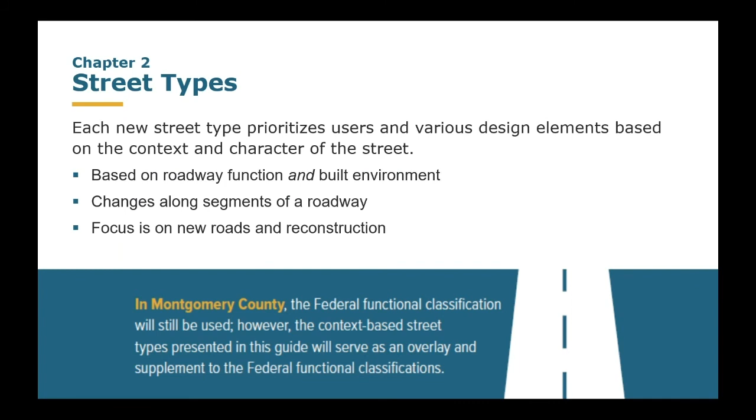There are 12 street types that we have developed for this study. What you'll notice is that there are actually 6 area types: downtown, town center, suburban, neighborhood, industrial, and country. Within each of these area types, there are a couple of different street types.

The first street type, downtown boulevards, are main streets you would find in CBDs. These typically have BRT routes planned along them and have frequent transit service and high pedestrian and bicycle activity. Examples shown within the guide and on the screen here include Georgia Avenue in downtown Wheaton, Rockville Pike in White Flint, and Wisconsin Avenue in downtown Bethesda.

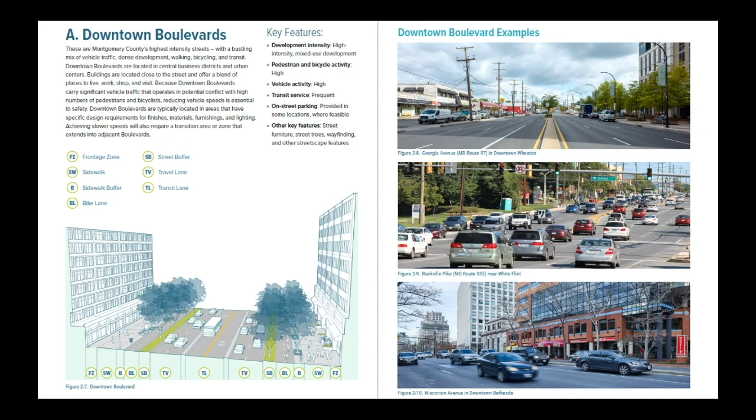Downtown streets are often the side streets in these same downtown areas. They typically have moderate transit service and high pedestrian and bicycle activity. Examples include Fenton Street in downtown Silver Spring, Nicholson Lane in White Flint, and Grandview Avenue in downtown Wheaton.

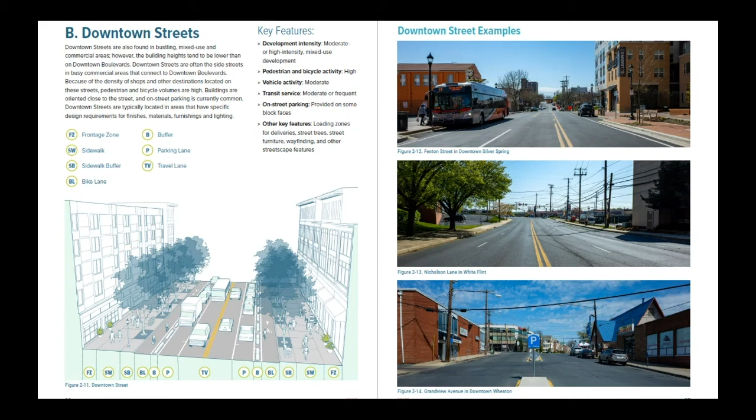Boulevards are the main arteries in the suburban portion of the county that provide critical connections between major activity centers. These roads have frequent transit service, are likely a master plan BRT corridor, and typically have moderate pedestrian and bicycle activity. Access to transit has typically been the priority in the past in providing bicycle and pedestrian facilities along these corridors.

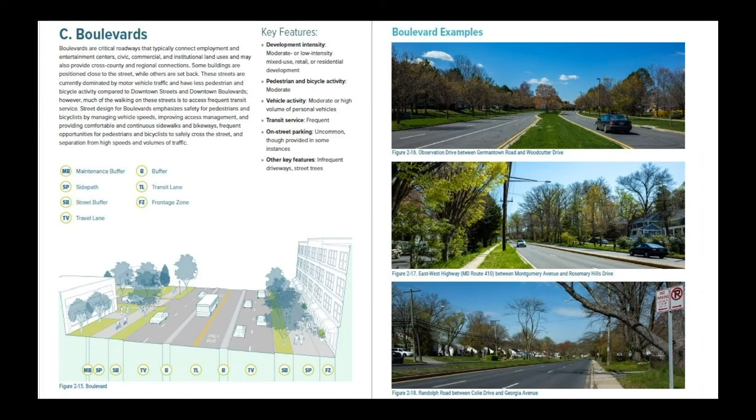Town center boulevards are located in medium to small activity centers, of which there are many within the county in a wide range of contexts. These roads provide high traffic volumes, frequent transit service, and moderate to high pedestrian and bicycle activity. Examples shown include Connecticut Avenue in Aspen Hill, Veirs Mill Road near Randolph Road, and River Road in Westbard. This area type also includes areas such as Damascus, Olney, Germantown, and Burtonsville in the upper and northern portions of the county.

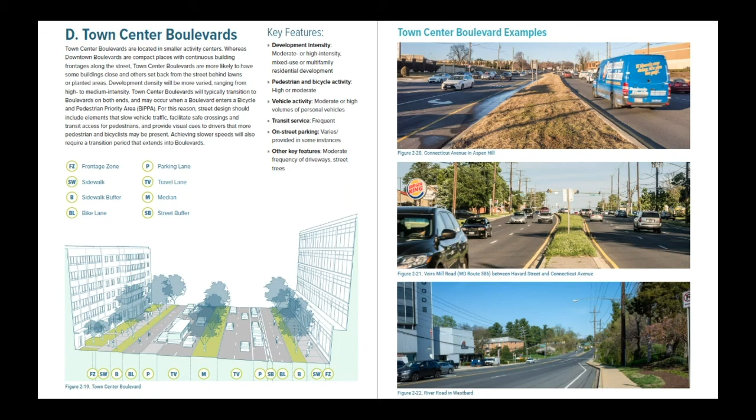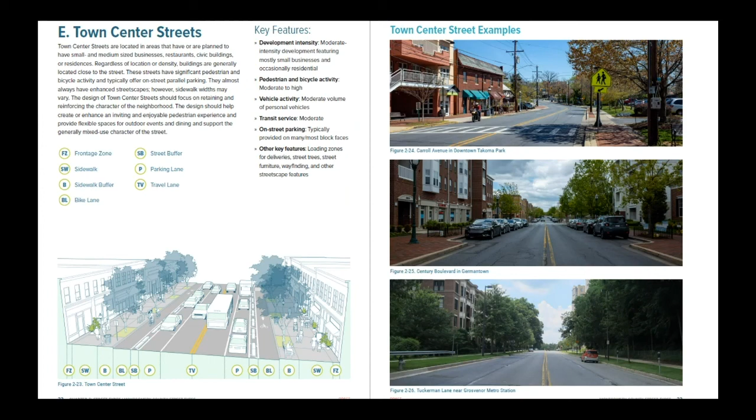Town center streets are typically the side streets in town center areas. They can support moderate intensity development, including commercial and residential development. Along these roads, transit service is typically moderate, and pedestrian and bicycle activity can range from moderate to high. Examples shown on this slide include Carroll Avenue in Takoma Park, Century Boulevard in Germantown, and Tuckerman Lane near Grosvenor Metro Station.

Neighborhood connectors are residential through streets. In our current road code, these streets are typically considered minor arterials or primary residential streets. Along these roads, transit service is typically moderate to high, and pedestrian and bicycle activity is moderate.

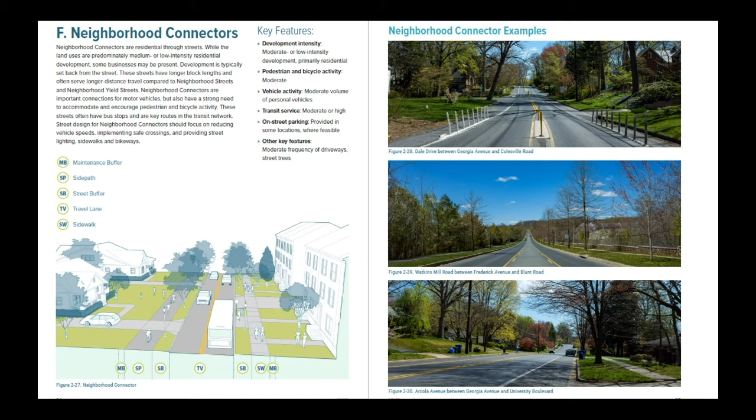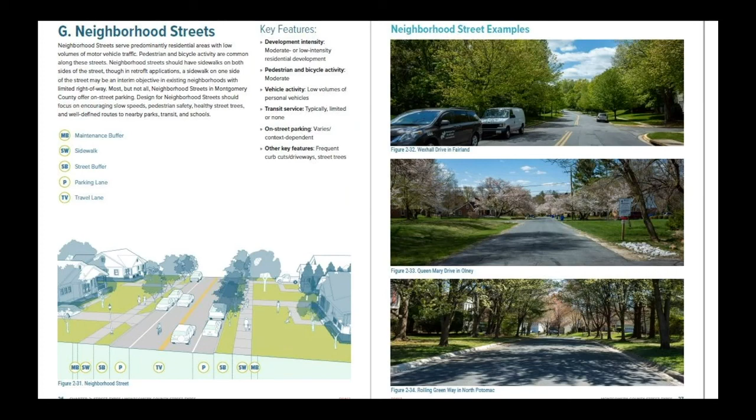Neighborhood yield streets are more narrow residential streets, very common in older residential areas in the county. With a total width of typically 28 feet, the street does not have a double yellow center line, and usually has parking on both sides. Vehicular travel really has to occur through one lane, and drivers have to negotiate and navigate around parked cars and cars coming from the other direction, as there's only one effective travel lane. As a result, these streets typically have slower vehicular travel speeds.

Pedestrian and bicycle activity is also very important on these kinds of streets, and there's definitely no transit service on most of them. Examples of this street type include Sanford Road in Forest Glen, Allegheny Avenue in Takoma Park, and Mansfield Road in Silver Spring.

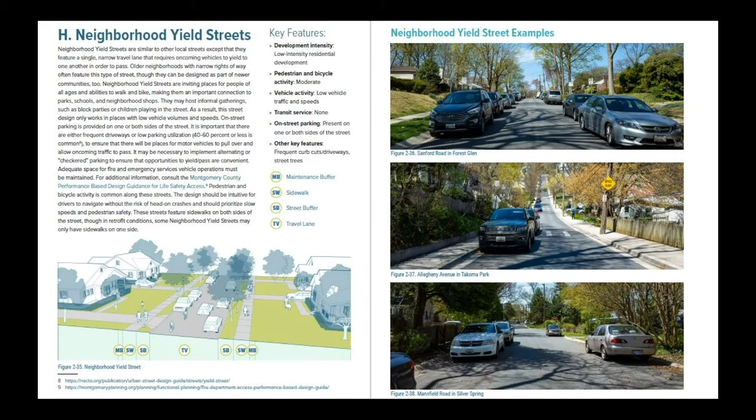Industrial streets are 2 to 5 lane streets that service and pass through industrial areas in the county. While there is a need on this street type to consider a higher percentage of large vehicles, these streets typically have moderate transit service and moderate pedestrian and bicycle activity, and many of them are often through streets as well, with some arterial function.

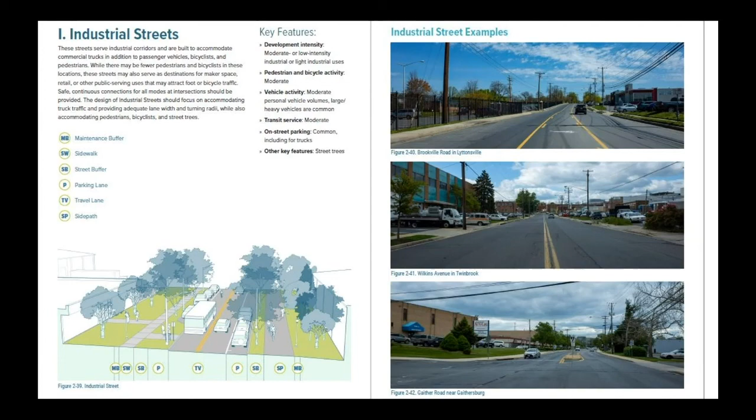Country connectors are the arterial streets in the rural areas of the county, and they provide a critical role in connecting communities. These streets typically have low to moderate transit service and low to moderate pedestrian and bicycle activity. This is one street type where it's clear that we have not always done enough in providing pedestrian and bicycle facilities in the past. Examples include Seneca Road, Germantown Road between Germantown Park Drive and Darnestown, the southwestern part of Germantown Road, and New Hampshire Avenue and Damascus Road between Ashton and Damascus.

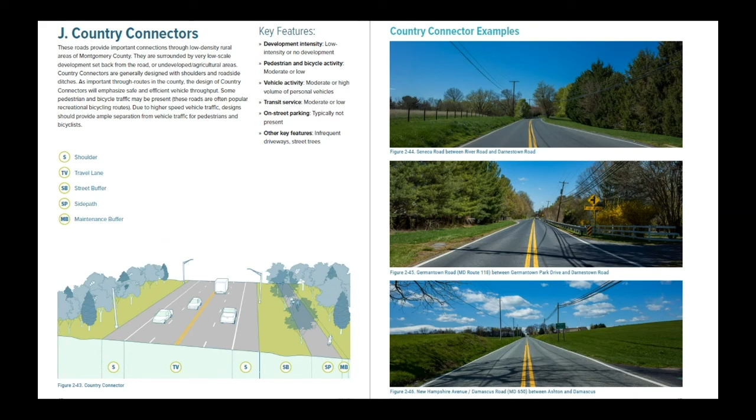Country roads are the main residential streets in rural areas of the county. Transit service along these roads can vary based on context, and pedestrian and bicycle activity can range from low to moderate. These roads are typically uncurbed, but some may have curbs in sections.

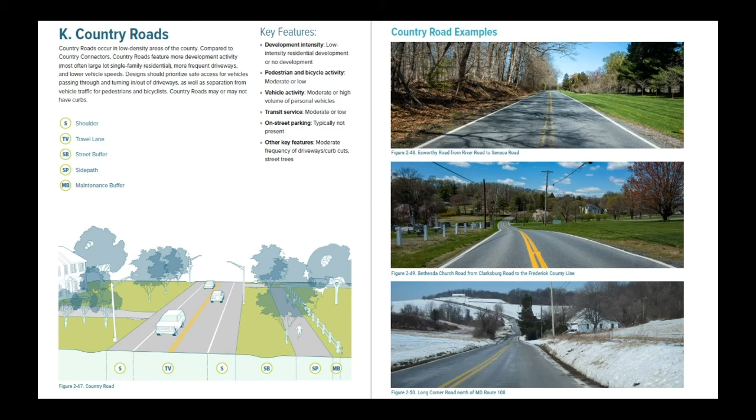This is the last of the 12 street types: major highways, which are limited or controlled access streets designed to focus on vehicular throughput. Transit service can range from moderate to frequent, and pedestrian activity is typically low. Examples include Sam Eig Highway near Washingtonian Boulevard, Great Seneca Highway, and Columbia Pike north of Prelude Drive.

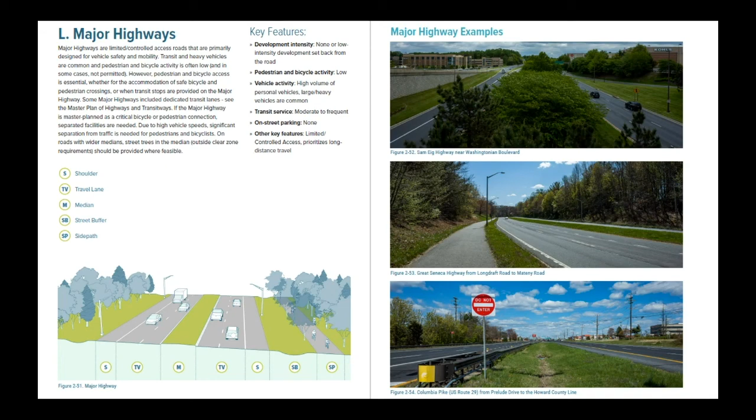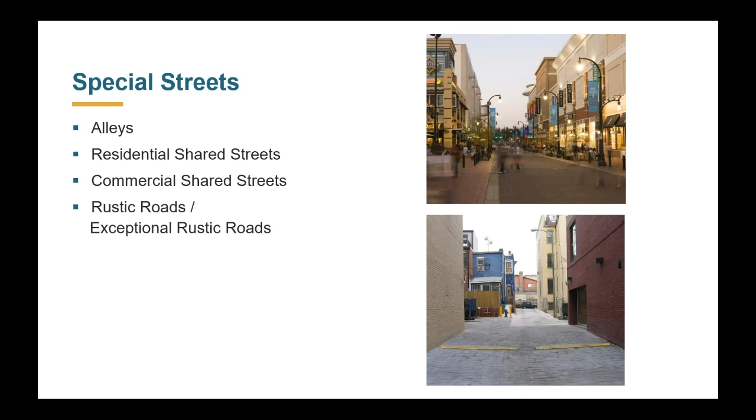In addition to the core street types, there are also more rare or unusual street types that the guide touches on briefly. For each street type, design guidance is provided within this document and in more detail in each of the following chapters, which Andrew will talk about shortly. There are many different elements—some physical, some geometric, some operational—and each street type has some slightly different nuances.

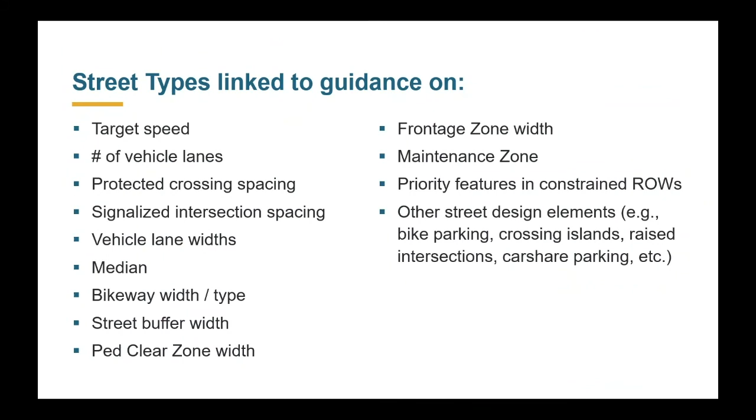Chapter 3 outlines the county's decision-making framework for street design, with an emphasis on identifying priorities in places with limited right-of-way. The master plan of highways and area master plans have established these rights-of-way, and these guidelines are not changing that. The intent of this chapter is to help designers prioritize improvements within these constrained rights-of-way. And with that, I'll turn it over to Andrew.

Hi, I'm Andrew Bossi with the Montgomery County Department of Transportation. I will take us through the rest of the chapters.

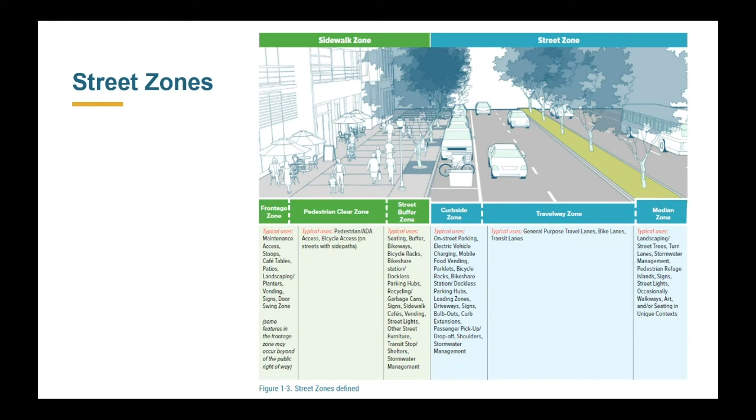Chapter 4 focuses on the sidewalk zone, which includes elements located between the curb and the property line. This gives design guidance for the 3 zones that comprise this area.

The frontage zone is on the outside, up against the right-of-way line. It's in part to provide a maintenance buffer, or it can also be an amenity space for things like outdoor cafe seating.

The pedestrian clear zone is, to me, the most important area. This is intended to be completely clear, meaning no signs, no poles, no grates. It's supposed to be as straight as can be, and pavement must comply with ADA requirements.

These clear zones have been our standard for many years now, but this guide is mostly making them even bigger, particularly in downtown and town center areas. Our standards have been about 5-6 feet up to today. This is going to increase that.

The street buffer zone is where you'll usually find landscaping. It may include street-side furniture like benches and waste bins. It's also where poles, signs, parking meters, and all that stuff are to be located.

This is where you'll likely find bike racks and where we expect scooters to be parked. This also includes off-street bikeways, which I'll come back to later on.

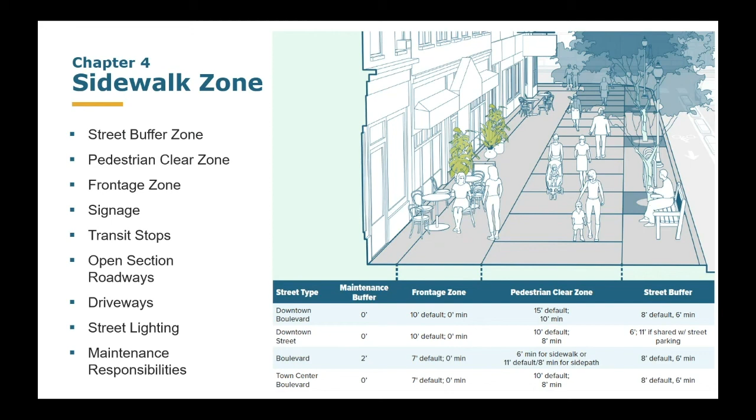Chapter 4 also includes information on signing, transit stops, open section roadways, which are streets that don't have curbs, driveways, street lighting, and maintenance responsibilities.

Now onto the sidewalk zone guidance. Could you step back one, please? This chart here includes a number of other features.

This table from Chapter 4 shows what features are required, recommended, or optional across each street type. You'll see a similar chart for each of the zones going forward.

The green areas like trees, landscaping, and rain gardens are required across most street types, as are sidewalk level driveways. This means if you're a pedestrian traveling along a sidewalk, you won't have to deal with using ramps to go down and up at each driveway.

The sidewalk is your space. Pedestrians are the priority, and so pedestrians stay at the same level. Cars turning in and out of driveways will have to go up or down in the area between the sidewalk and travel lanes.

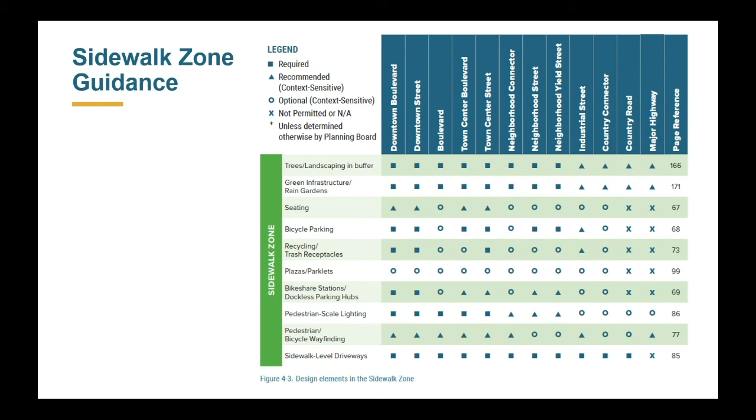Chapter 5 focuses on the street zone. This is the vehicular area between the curbs. This area is comprised of 3 other zones, the curbside, travelway, and median. And this chapter also includes guidance on utilities and network connectivity.

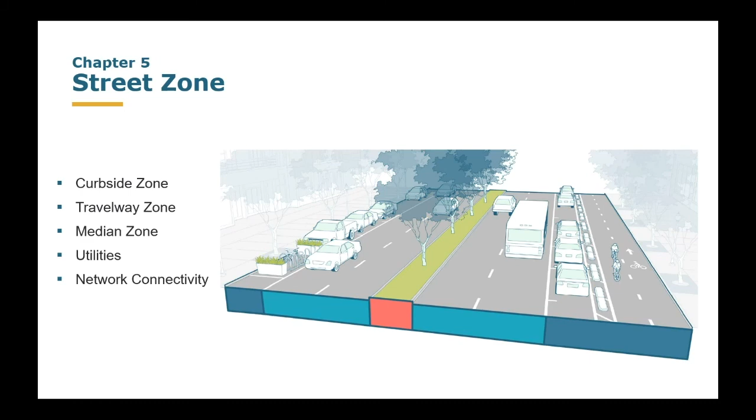Much of the list here is of things in the curbside zone. That includes stuff like parking, loading, and parklets. At the bottom is travel lanes, which are, along with dedicated transit lanes, are part of the travelway zone. And the median zone referenced at the bottom is, of course, the area at the middle of some streets that's usually landscaped.

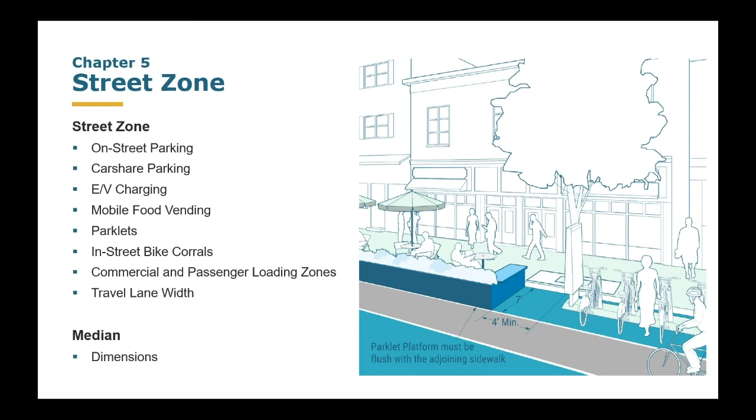We're looking to underground utilities, as well as minimize and consolidate driveways, particularly in downtown and town center areas. We note a need for pickup drop-off zones, accessible parking, car share parking, electric vehicle charging spaces, particularly in downtown and town center areas.

These are all pretty new things for the county, and we still don't really have detailed guidance or standards on these. This guide more establishes our interest and is the first step in really getting these moving.

The guide includes widths for each street feature, including travel lanes, as you can see here. The current road code calls for narrower lanes only in downtown areas, and we're looking to take this even further, perhaps most noticeable also in town center and neighborhood areas.

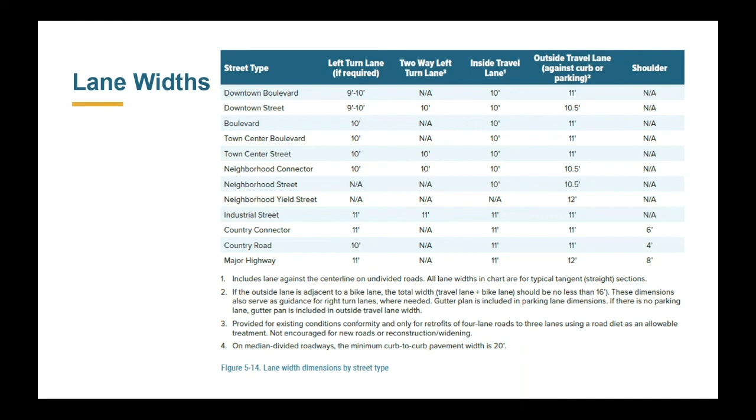This is an important part of both slowing traffic as well as reducing crossing distances for pedestrians.

This guide won't really change when medians are included from where we are today, but it does provide guidance on median design. It generally requires a minimum 6-foot median, which corresponds, when a median is provided, of course, to the width required for a median to provide room for pedestrians and bicyclists to use it.

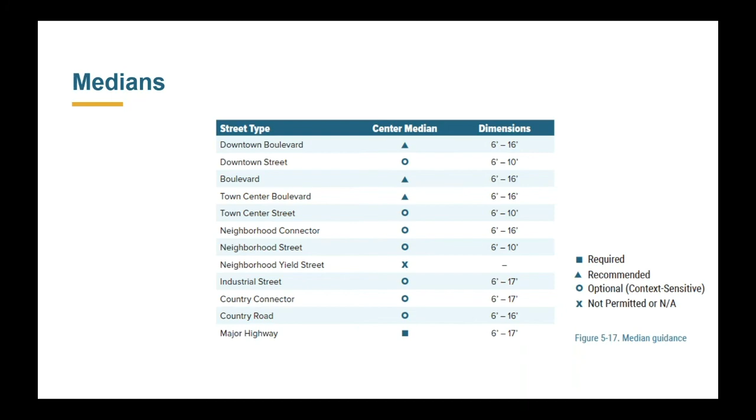The exceptions to this are on downtown streets and town center streets, where turn lanes would completely replace a median area, potentially. You see this occasionally already in Montgomery County, and it's especially common in our neighboring jurisdictions.

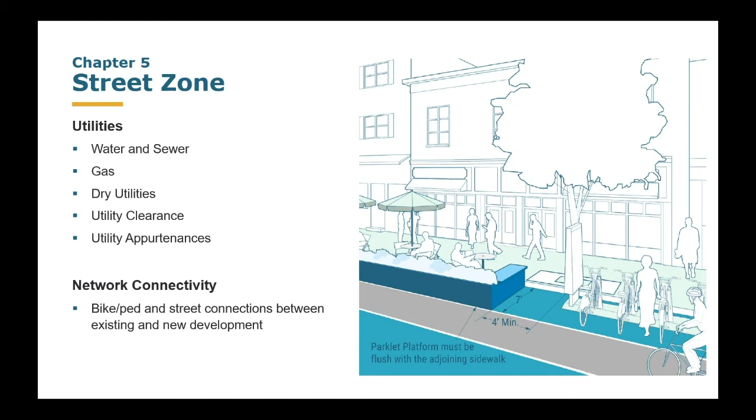Chapter 5 also provides guidance for utilities, and it includes a section on promoting connections within the street network. So basically, getting away from dead-end streets and cul-de-sacs, moving towards grids that provide more options, resiliency, and improve pedestrian and bicycle connections.

Sounds like the fireworks might be starting up in my neighborhood, so hopefully that'll stay quiet for a little bit longer yet.

Chapter 6 covers intersections in quite a lot of detail. I want to highlight a few key sections here.

Access management is something we expect we'll dive deeper into in the coming couple of years. Geometric design and design vehicles focuses on trying to design for tighter turn radii, which basically means more pedestrian and bicycle space, and cars have to go slower when they're making those turns.

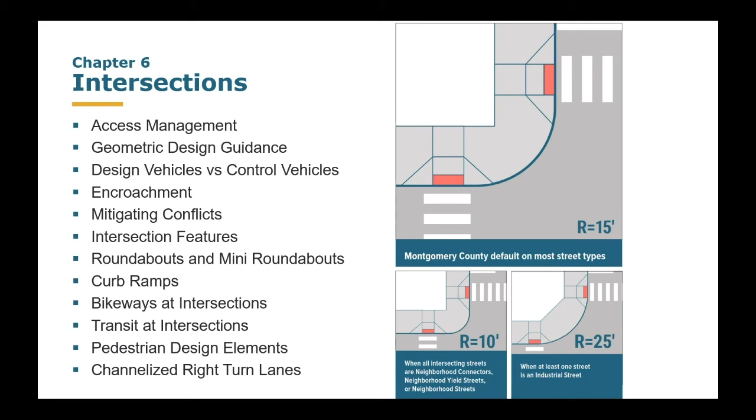Mitigating conflicts generally looks at ways to make intersections safer, and this also includes a lot of guidance that really centers pedestrians, bicyclists, and transit through intersections. A good example is that this continues what has been county policy for a while, seeking to eliminate most channelized right turn lanes, other than where they're expressly urgently needed, with really no other exceptions.

Along downtown streets and town center streets, this opens the door to using speed tables and raised crosswalks to slow traffic and provide for safer crossings. This is a pretty substantial change from where our policy has been.

I'll add that at this point, the buttons themselves would still be there, as they provide instructions and location feedback required for ADA needs. Also, the guide keeps doing what we've been doing in recent years when it comes to things like providing countdown signals, accessible pedestrian signals, which are the beeping sounds you hear when you're at a traffic signal, and also ramp design, such as ensuring that pedestrian ramps directly align with the receiving ramp. We should not be building any new ramps that align pedestrians into the middle of an intersection.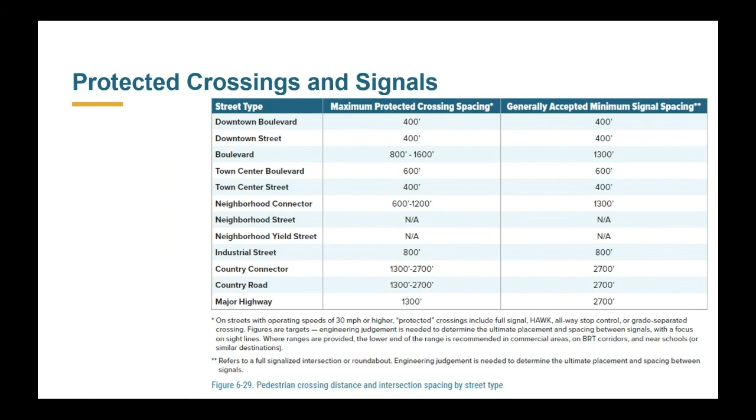Chapter 7 provides guidance for building green streets, which focuses on vegetation in Section 7.2, and in Section 7.3, there's stormwater management. This is all intended to help the environment while also making streets just pretty and pleasant places to be.

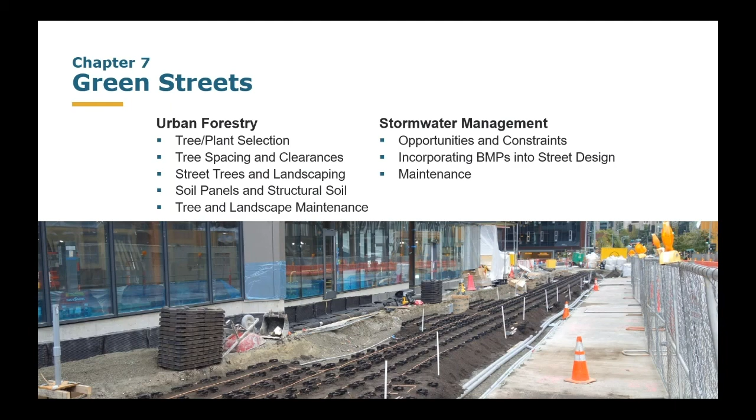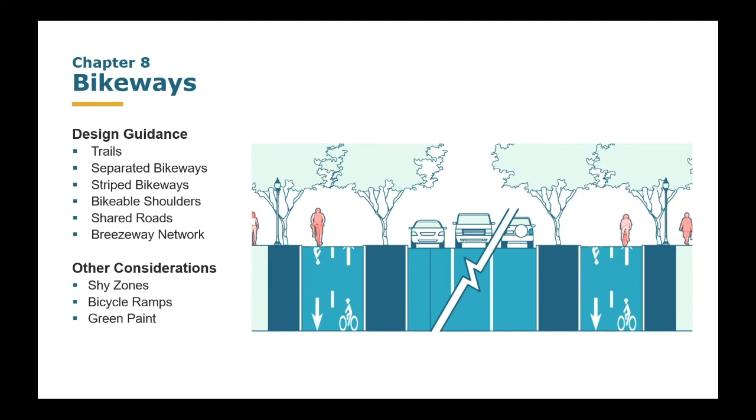Chapter 8. The design guidelines in Chapter 8 largely pull directly from the master plan, the bicycle master plan, though it takes it a step further by providing some more detailed design parameters for each bikeway type.

So far, I haven't really mentioned bikeways too much, but the guide includes a lot of information on them. As I said, it really pulls from the bicycle master plan approved, I think, two years ago. It establishes default bikeways for each street type, though the bicycle master plan can override these defaults, as can detailed engineering if it's found that something different makes more sense.

Most notably, our guide suggests separated bike lanes in downtown and town center areas, which helps separate traffic by giving bicyclists their own space apart from motor vehicles as well as pedestrians. In areas with fewer pedestrians and bicyclists, shared pedestrian-bicycle side paths remain the default, but they're generally proposed to be wider. The bike master plan also recommends separated bikeways in a number of areas outside downtowns and town centers, because there's still a need for that separation and for something higher intensity.

The bike master plan also includes breezeways, which are intended to be sort of like bicycle highways. This guide does not yet establish design guidance on those, but it's something we're very mindful of a need for. So far, we've been going with very wide 16-foot areas for breezeways, and expect that may be further refined in coming years, likely to be featured in the Complete Streets Guide's next version. The guide also includes guidance on some other conflict areas, including bike lanes alongside floating bus stops and bike lanes along on-street parking.

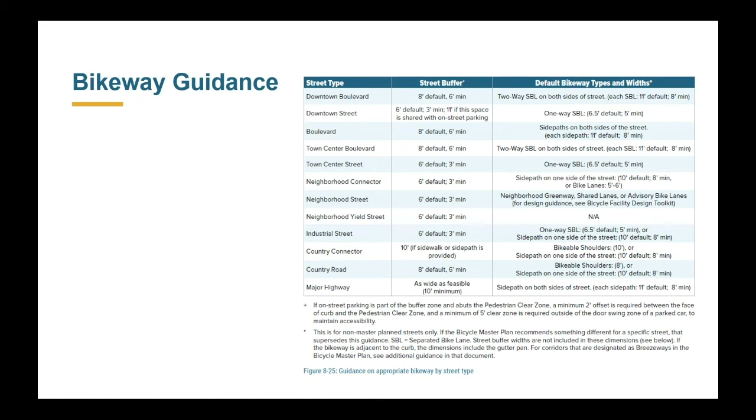Chapter 9 focuses on speed management and is organized into three sections, which I'll get into in the next few slides. Slower speeds are a big focus of this guide, as speed is one of the most pressing issues identified for achieving Vision Zero. The graphic at the right highlights how speed affects a driver's field of vision toward the top, their ability to stop around the middle, and the lethality in the event that a motorist strikes a pedestrian.

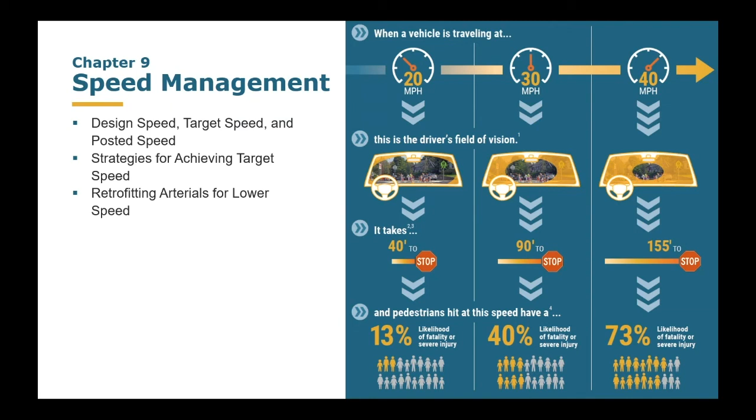We generally use four different types of speeds: target, design, posted, and operating. Each leads into the next, and the ultimate goal is for all four to eventually be equal. The target speed, which is what you see on the chart, is basically a master-planned speed—the ultimate speed we want motorists to travel at by the lifetime of a master plan.

The design speed is used in engineering a roadway. It should match the target speed, designed so that motorists will travel naturally and instinctively at that speed. The posted speed is what you see on the signs when driving; it should eventually match the design speed, which should match the target speed. The operating speed is what motorists are actually driving at—it should eventually match the posted, design, and target speeds. The intent is for the design of a roadway to naturally guide you to the speed you should be at. Speeding shouldn't be inadvertent. So getting back to the table, it all starts with those target speeds.

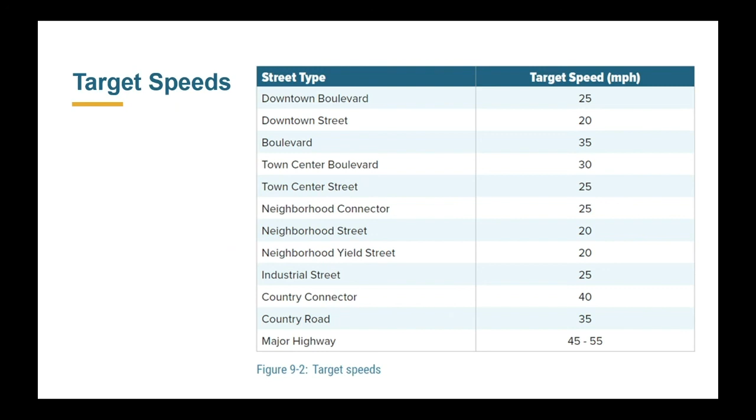As I said, that's sort of the master plan speed. With Vision Zero in mind, this guide sets lower target speeds than we have today across every street type. This is especially pronounced in downtown, town center, and neighborhood areas. If you've heard of the '20 is Plenty' campaign, this draws directly from that.

There's also guidance on other means of managing speed, sorted into road narrowing, such as reducing the number of lanes or narrowing lanes—narrower lanes are already proposed as the default for some street types. And vertical measures, such as speed humps, speed tables, and raised crosswalks. Speed tables are sort of longer speed humps, and raised crosswalks are pretty much just speed tables with crosswalks on them. These all differ from what's called speed bumps, which are tiny and extremely bouncy things you'll sometimes come across in private parking lots. We don't build those.

Speed humps and tables don't require you to slow to a crawl to travel over them. They're tended to be more in line with the target speeds. Horizontal measures use things like curb extensions, bulb outs, chokers, and islands to make a road seem narrower.

We already use these quite frequently in Montgomery County. Traffic diverters, which we also use, are found in some neighborhoods and can block through flow. One of the more common uses is turning a four-way intersection instead into a pair of 90-degree curves.

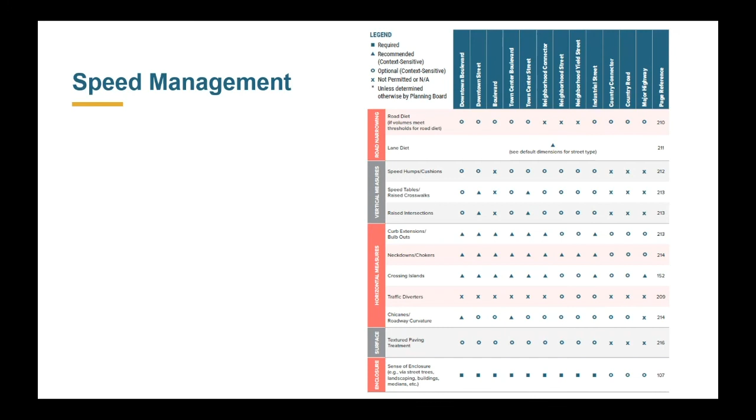Lastly, there are the surface treatments, such as using lines or rumble strips across a roadway that can make a motorist feel like they're traveling quickly, or perhaps using textured pavements.

Chapter 9 also includes a section that focuses on arterial roadways specifically, as these are where a disproportionate number of fatal and severe crashes occur, and by the nature of their size, they are also the most difficult to slow.

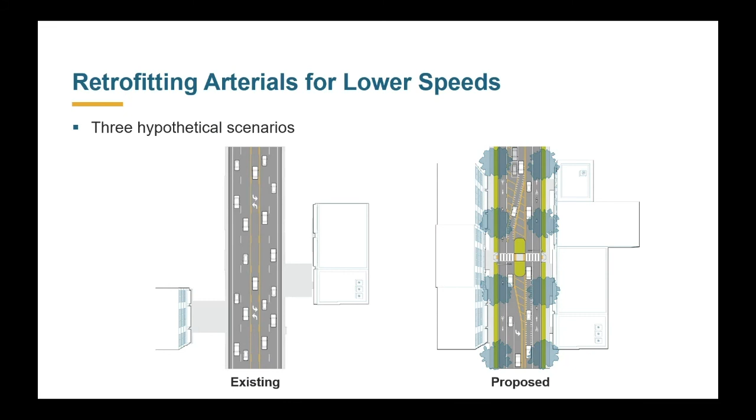Of course, this can remain difficult if there is non-support for reallocating space to provide for safer configurations, or as many of these corridors are state roads that aren't formally within our jurisdiction. Master plans are among the key starting points in identifying where things, like you see on the screen here, are perhaps most viable and desirable.

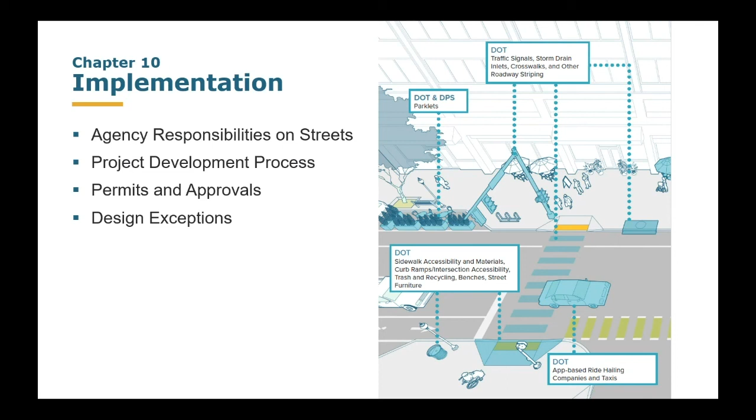Just about done here, but Chapter 10 is about implementation, including agency roles and responsibilities and the project development process. Sections here include agency responsibilities on streets, project development process, permits and approvals, and design exceptions.

And with that, we're pretty much at the end of the document. I'm going to turn it back to Steve for our closing slides before we head into Q&A.

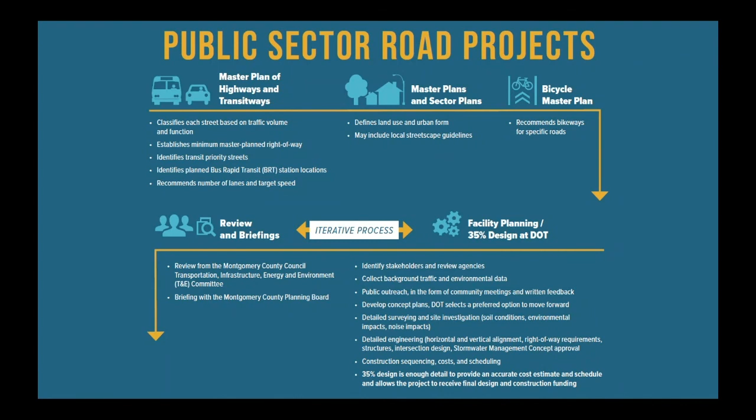Thank you, Andrew. So currently, we're now in the public review process, and as I mentioned, we're very interested in having as many small virtual meetings as possible with interested parties. So if you're listening, please contact us. We'd be happy to come to your organization's meeting.

Basically, the schedule is between now and July 23rd. We need to get as much public input as possible. On July 23rd, there will be a public hearing in front of the planning board, which will be an opportunity for folks to testify. So we figure the more outreach we can do in advance of that, we can really help to inform what's in the plan, how it does or does not work for you, and then give you an opportunity to prepare written comments to the chair of the planning board.

Going further, this will have work sessions with the planning board in the fall, eventually be transmitted to the county executive and the county council for detailed review and approval. There will be changes once this guideline is finalized to make some changes to the county code, executive regulations, and there would be a requirement to change the master plan of highways and transitways, which is the tool that we use at the planning department to classify all the streets and assign certain categories and certain restrictions.